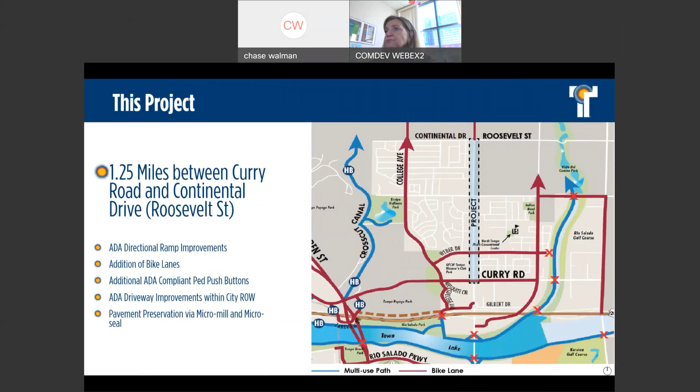This project's primary purpose is to extend the bike lanes that currently end at our border with the city of Scottsdale at Continental Drive, or Roosevelt Street as it is in Scottsdale. This project proposes to extend those bike lanes south to our existing bike lanes at Curry Road. In addition to the bike lanes, the project will also be proposing to improve ADA accessibility along the corridor, for all the corridor that's within city right-of-way.

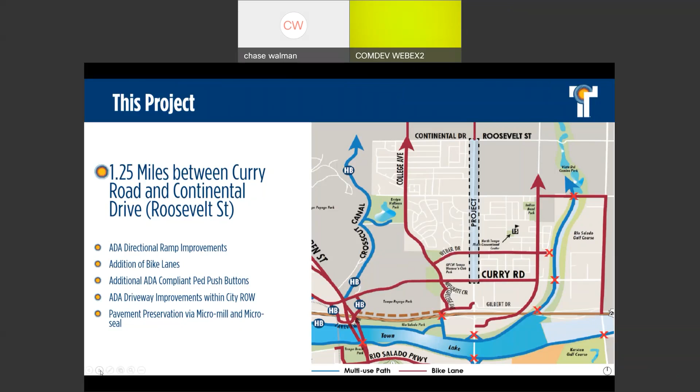Some of these improvements include ADA directional ramps at all the street crossings. It includes the addition of ADA compliant pedestrian push buttons at our signals. And then there are also a few driveways that are within city right-of-way that we are proposing to improve to be ADA compliant. So with all of that, we will of course do pavement rehabilitation in the form of a micro mill and micro seal. It'll also receive a new pavement treatment along the project corridor.

Next slide, please. A little bit about the history of the project. The project was first identified in Tempe's General Plan 2040 and the connectivity portion of the general plan, but it was also identified for bike lanes through the city's transportation master plan.

With that, staff in 2017 applied for the bike lane project to compete for regional and federal funding within the region. In 2017, the city was awarded just under $1.3 million for the construction project in 2022, and that was a Federal Highway Administration grant.

And then in 2020, staff also applied for an additional grant, and this time that was for the final design plans for the project. So in 2020, the project was also awarded an additional grant for $285,000 that would fund the final plan specs and estimates for the project.

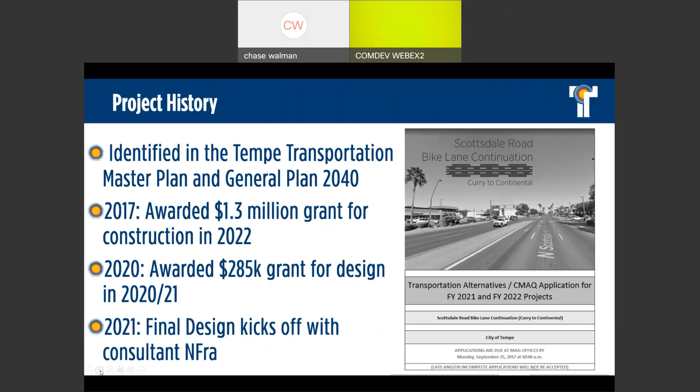With that, in 2021, this year, we kicked off the designs, and that's with our design consultant, NFra, and they're the ones that we'll be working with and prepared the preliminary design plans today that we'll be reviewing. Next slide, please.

I did want to mention some of the other concurrent planning work that's being conducted in the area. First, the ADA transition plan. This plan really identifies the deficiencies of ADA accessibility within the city's right-of-way. So we're able to use that plan to understand some of the ADA deficiencies and improvements that we'll be able to make within city right-of-way as part of this project. We'll be looking to leverage that plan when we propose these ADA improvements.

In addition, we also want to work towards Tempe's Vision Zero resolution, which is to reduce fatal and serious injury crashes to zero. This corridor is identified as an area with high crash rate along the project corridor and high pedestrian and cyclist crashes. So this is something that we're going to look at closer as we conduct this project and other projects in the area.

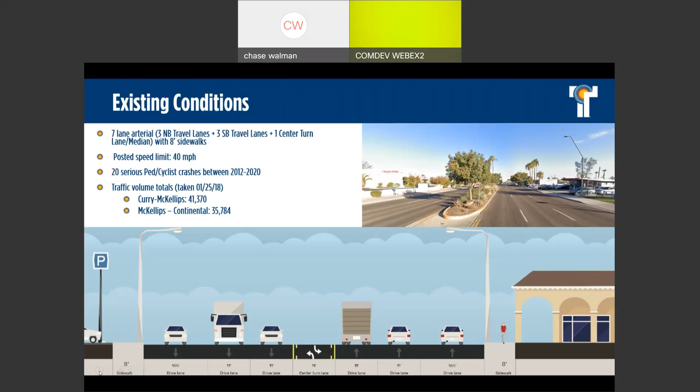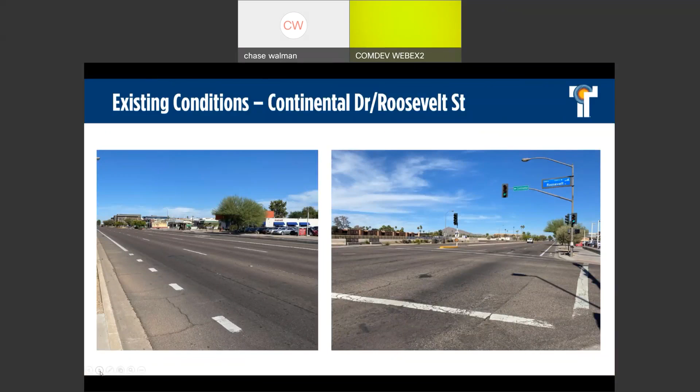This first photo is showing our connection on the north end of the project to Continental Drive, or Roosevelt Street as it's signed out there. This is looking north at our border with the city of Scottsdale, and you can see the bike lane configuration that we are trying to extend south into the city of Tempe.

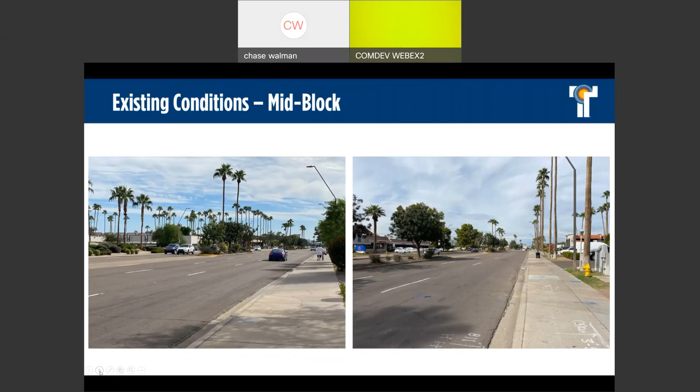This is a typical mid-block view, looking near Hancock Avenue. This slide gives good context as far as how wide that outside curb lane actually is in context with the vehicle that's occupying it. So this is your typical view of those mid-block areas of Scottsdale Road where we have the landscape medians and the 8-foot sidewalks.

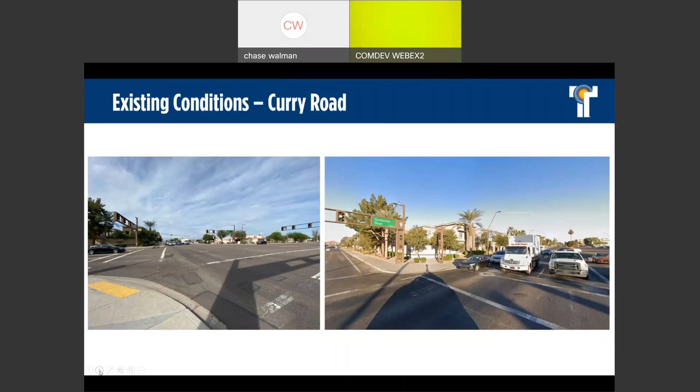And then finally, this is our southern end of the project, at Curry Road. What I wanted to point out here is just your connection point to the existing bike lanes that continue east and west along Curry Road here. This will connect over to the College Avenue area with additional bike lanes, as well as eventually get to the Crosscut Canal multi-use path.

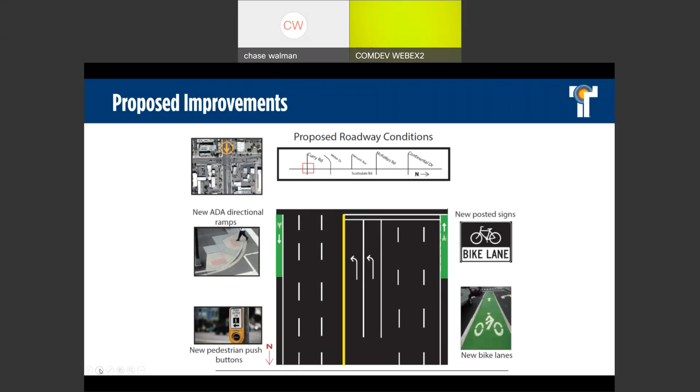And so this view is the cross section, so you really get an idea of what the new proposed dimensions will be. Overall, it's characterized as reducing some of the excess travel lane width that we have along the corridor in order to accommodate a 6.5-foot bike lane. So that's what we're proposing here, reducing that outside lane width to accommodate the 6.5-foot bike lane.

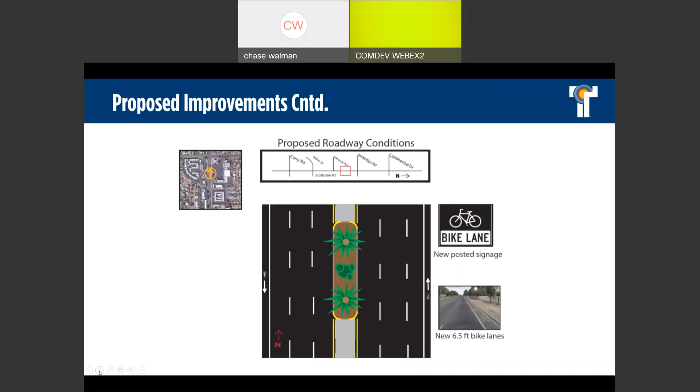And this is kind of an illustration view of a mid-block area as well. Really what this is showing is that we're looking to maintain all the landscape medians along the corridor. There are some sections where the medians are getting a little bit shorter to accommodate the new striping, but as far as the number of lanes or number of medians along the corridor, that will remain the same. The only difference here on these mid-block sections is the addition of the bike lane, and we'll of course have the bike lane symbol, but you'll notice here that it's our standard bike lane symbol as opposed to the green thermoplastic paint that we have at some of the arterial or street crossings.

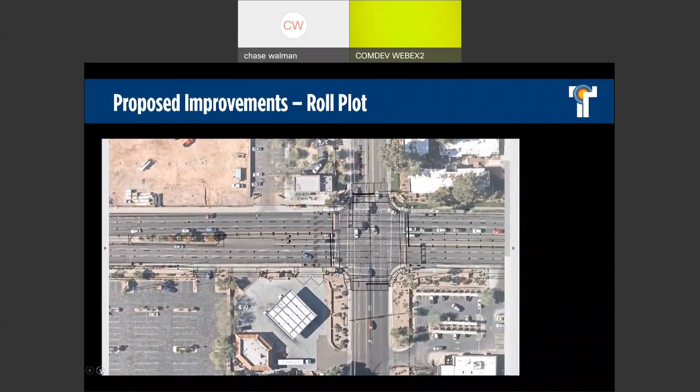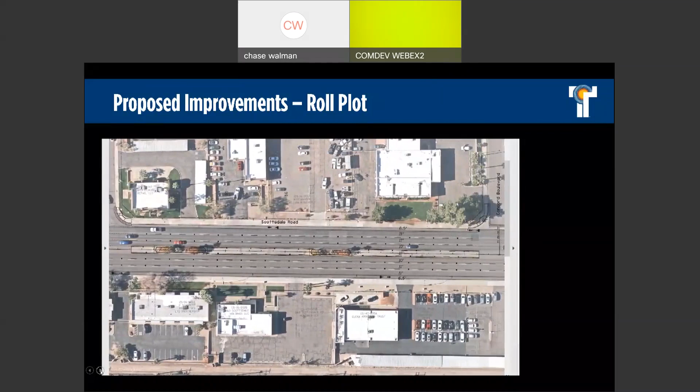As we approach McKellips, this is a section where we also have some curb reconstruction, this time on the east side where we have more available right of way. We'll be making driveway improvements along the east side of Scottsdale Road here from McKellips, just short of Fillmore Street. Beyond that, we'll again be within the curb-to-curb cross section for the project, instituting the bike lane here and the directional ramp improvements at the street crossings.

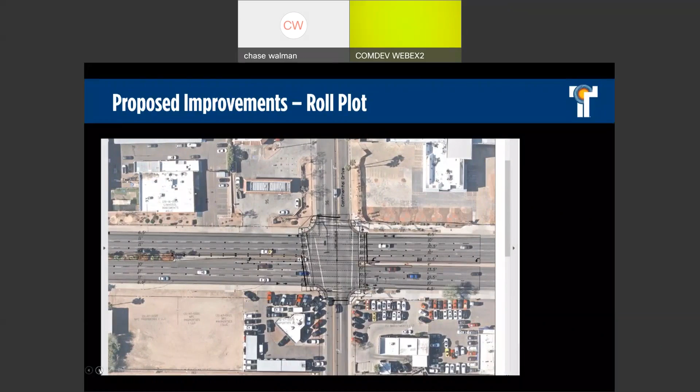This is our north end, where we connect and match the cross section with the City of Scottsdale for continuity. All right, next slide, Laura.

Although it's separately funded and programmed, we're going to look to coordinate this pedestrian signal construction with our Scottsdale Road bike lane project. I just wanted to make everyone aware that we also have this other project within the project area.